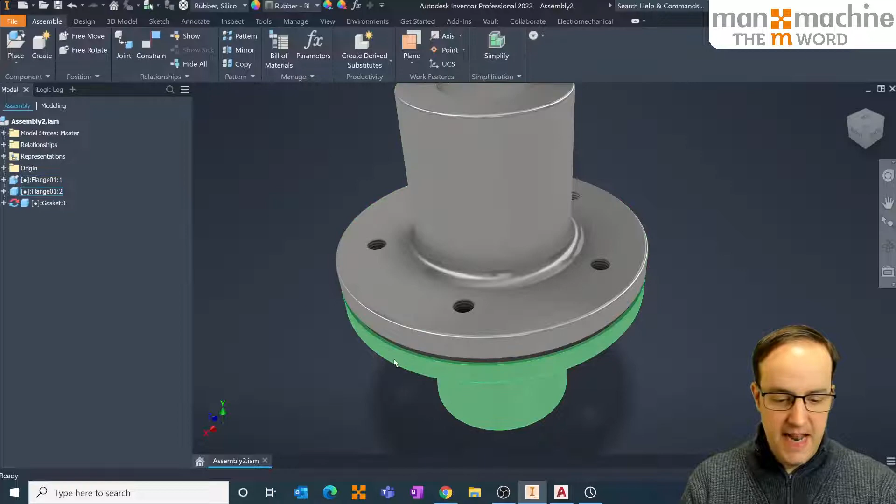So I've got a simple flange and gasket assembly here that I literally just threw together about 2 minutes before we came on air. Just a couple of simple revolves, nothing complicated. But what I want to do is connect these flanges together with a bolted connection.

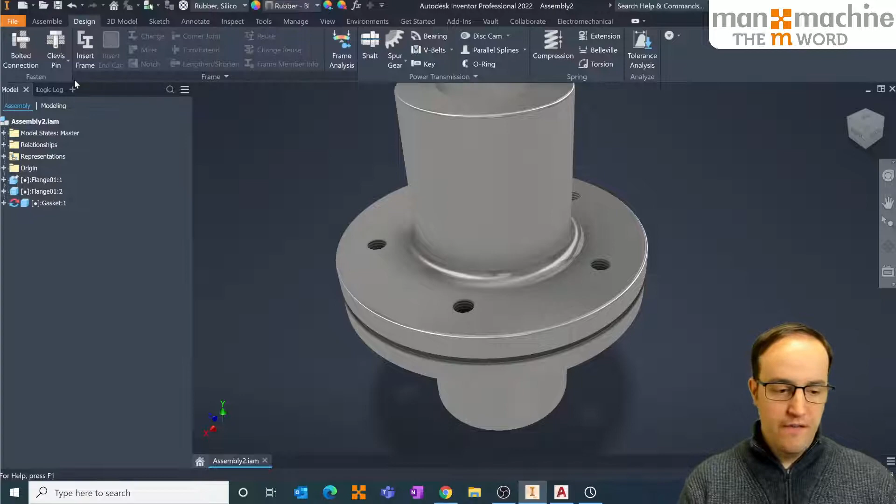Within my assembly environment, I'm going to go to my design tab, and we have a whole wealth of design accelerators on here for creating frames, shafts, spur gear assemblies, belt-driven assemblies and things like that. We're going to focus on bolted connection today because it's the simplest for our first session, just to give you a taster of what this is all about. But also, again, it's underused—there's people out there that aren't using this.

So let's start it up and show you what it can do. It's really straightforward and it can potentially save you a hell of a lot of time.

So when we're in our bolted connection dialog box, we essentially get a few different options. We can place those bolts on a linear XY dimension if we want to, concentric based on a circular edge, or something like that. I'm going to say that I want to pick an existing hole.

I choose a start plane, which is going to be the top plane where the head of the bolt sits—that's this top face here. Then I can pick my existing hole, so I can go and grab a hole. You'll notice it recognizes what's happened with my model.

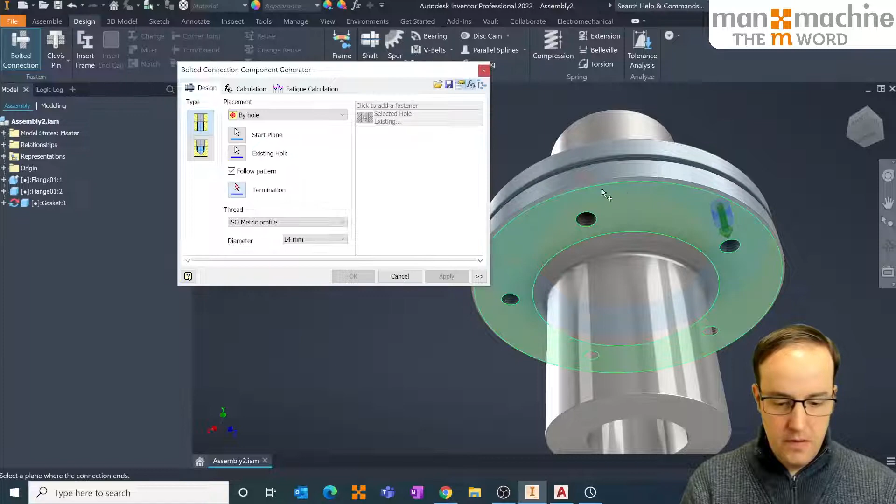Because I've built this from a hole, using the hole command and then patterned it, it knows that all of these are linked back to that original hole. So I go and select it, I'm going to ask it to follow the pattern, and I'm going to go and pick a termination plane underneath just here. What that will do instantly, as you can see, is a couple of things.

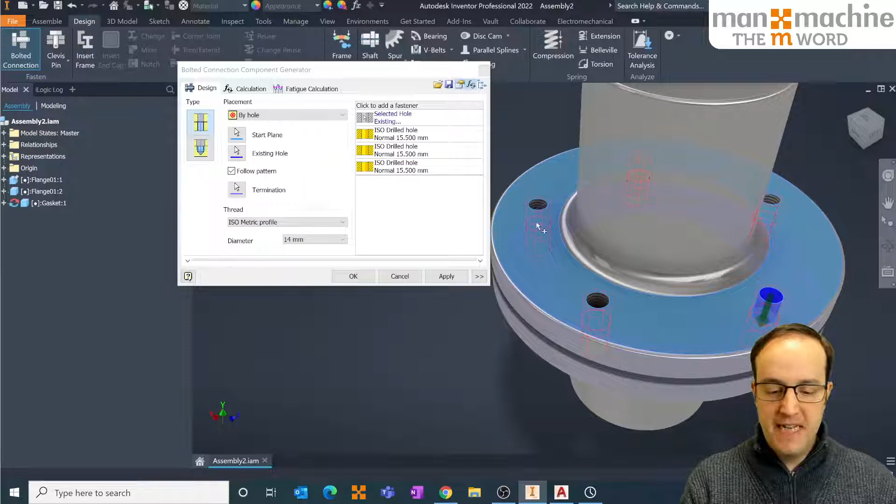Firstly, it gives me a preview on all of my holes saying that's where I'm going to place these bolted connections, and at the moment it's previewing that in red. Why? Because based on what you've selected at the bottom, which is using an ISO Metric profile, 14 mil diameter, it needs to drill a bigger hole. Based on that, I think these are 15 mil holes here rather than 15 and a half. It's telling us it needs to take away geometry or volume from this model in order for that to fit.

So it's going to drill additional holes in here. Which is great, and we can come in and chop and change that as we see fit, but I'm not going to—I'm going to say, great, do what you need to do and take away the excess material from here. On there, we've also got this add fastener option.

Now, the first time this loads, it's going to be a little bit slower than the second and third time because it's referencing my local Content Center from my database. What I can do, because I've selected the very top part of that tree, is select my bolt. So I'm just going to go in and select this hex head 4014 ISO bolt.

After that, it gives me the ability to add a fastener underneath, like a washer for example, or I can come and add a fastener underneath. I want a double washer setup, so I'm going to select an ISO 7092. And then at the bottom, after all of my holes, I'm going to select another washer.

I'll pick a 7092 ISO washer before eventually picking a nut, and we're going to pick a 4161 ISO M14 nut to fit on the end.

This gives us a little preview. We can change the length of the bolt if we want to, either in the window up here, or just by grabbing this and eyeballing it. So if you want a little bit of excess there, we can, or if it's too long and you want to take away, you can. I'm just going to put a little bit of excess on the end of the bolt, like so.

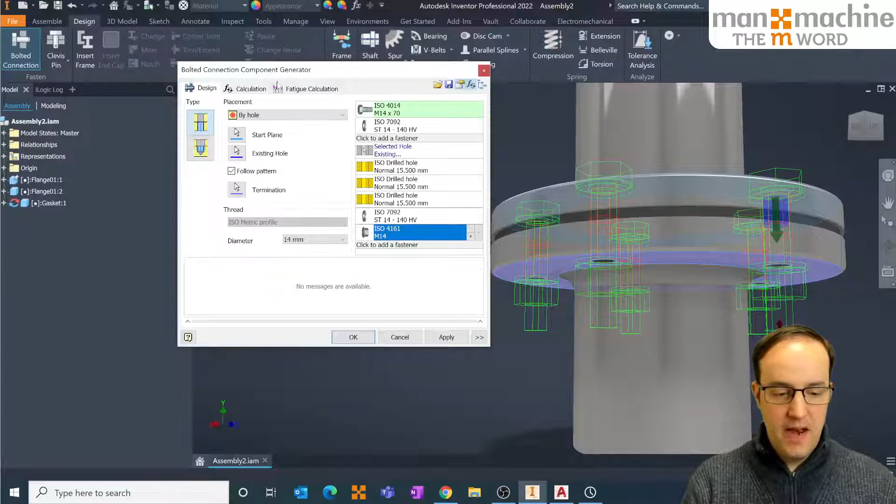Other things you have in here is the ability to come down and have a look at calculation, to get it to give us some basic hand calcs on that particular bolted connection to determine whether or not those components are going to be up to the job of connecting these systems together.

We've also got some base fatigue calculation that we can go into again if we want to after that, which again just looks at hand calcs and seeing if those nuts, bolts and washers are up to the job.

So if I just hit calculate on here and bring down my notes, we can see that it's missing some input essentially against those components. I've not put any particular forces on there, but it helps you as a designer go through things that you might be doing by hand and really automates them through the system, which is great.

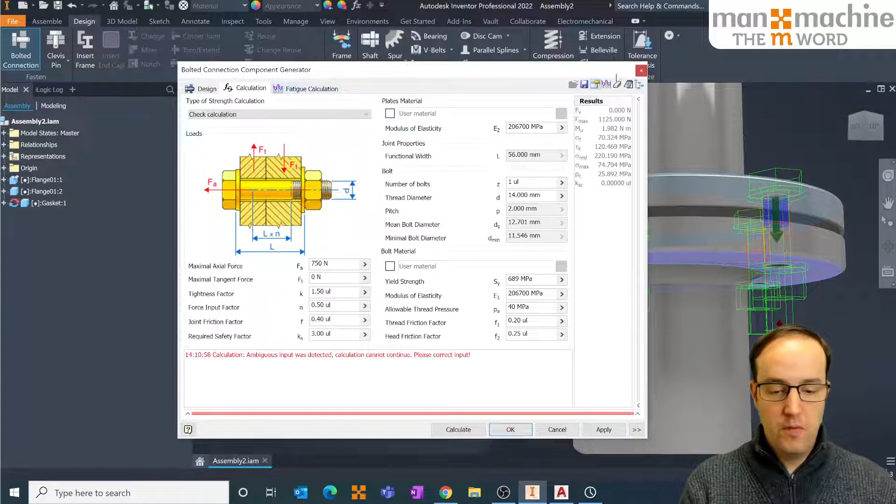If I hit apply, Inventor will pull those models from your content center, and once it's done that, typically the joy of live demos, it's going to crash on me. Don't you love it when that happens? Let's just try that again.

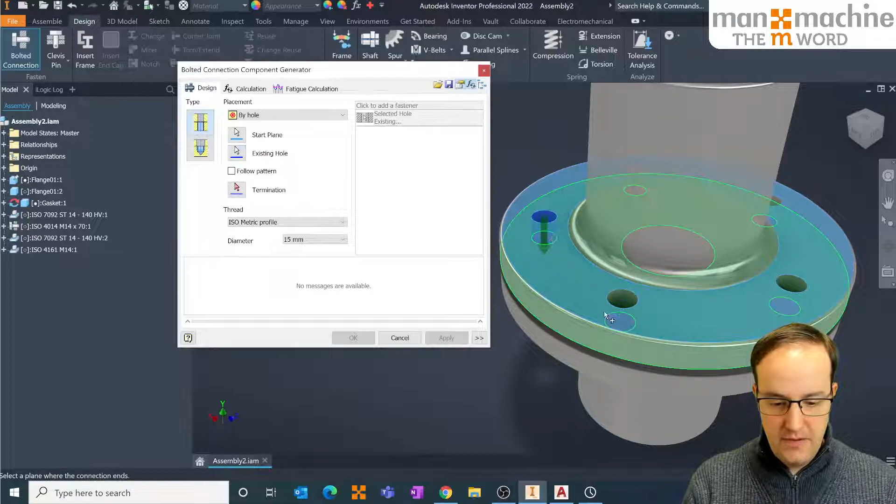By hole, start plane on there. The existing hole we want is this one, and then we want to have a follow pattern termination plane underneath.

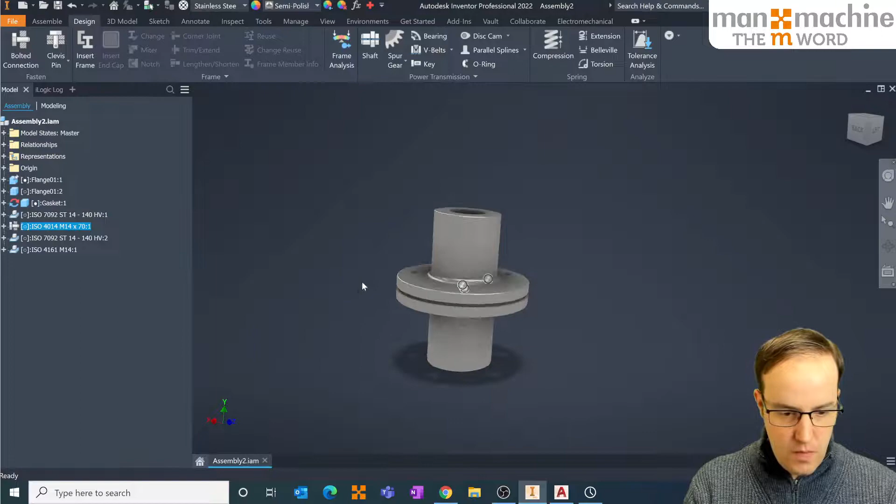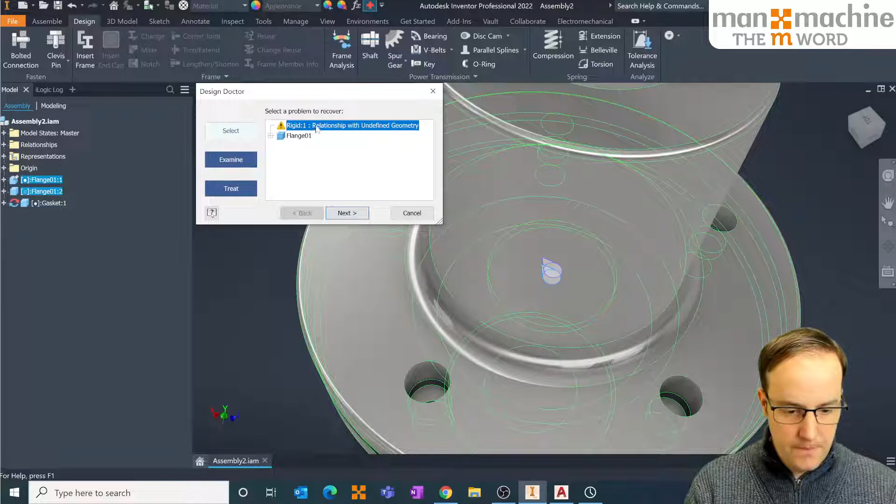Let's just take all of those off and try that one more time. My apologies, these sessions are not to show you issues; they're to show you things working. I think we've got a rigid constraint in there that looks like it's broken for some reason.

Let's have a look at that. Okay, we'll take him out. So let's try that again. Design a bolted connection by hole. There's my start plane, there's my existing hole. We want to follow the pattern, and then the termination plane is underneath.

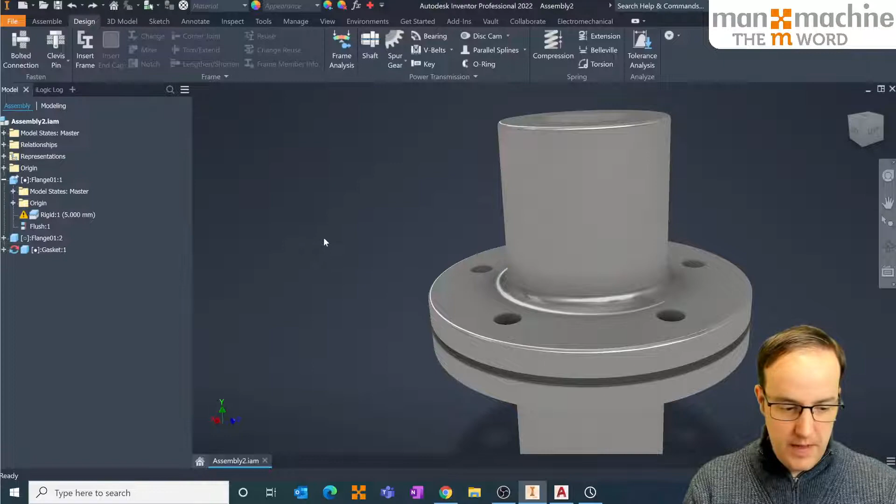Well, I really don't know what's happened there, which is great. Let's just do a few undos. Hit save. Try that one more time. I will only try it one more time rather than labouring the point. Clearly, I have an issue somewhere with my connections.

There's my hole. Thank you. Follow the pattern. Termination plane underneath. See, you really just wanted to see this several times. It was all on purpose, honest.

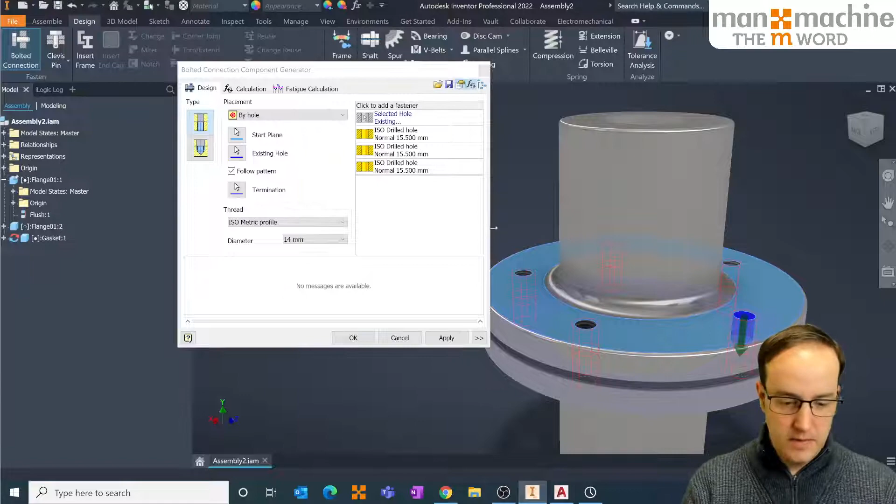So let's just quickly add those back in. I can use the template that I saved earlier. You see, now you don't know if it was done on purpose or not. I saved the template. Maybe I just wanted to show you the template being used. We'll go with that, shall we?

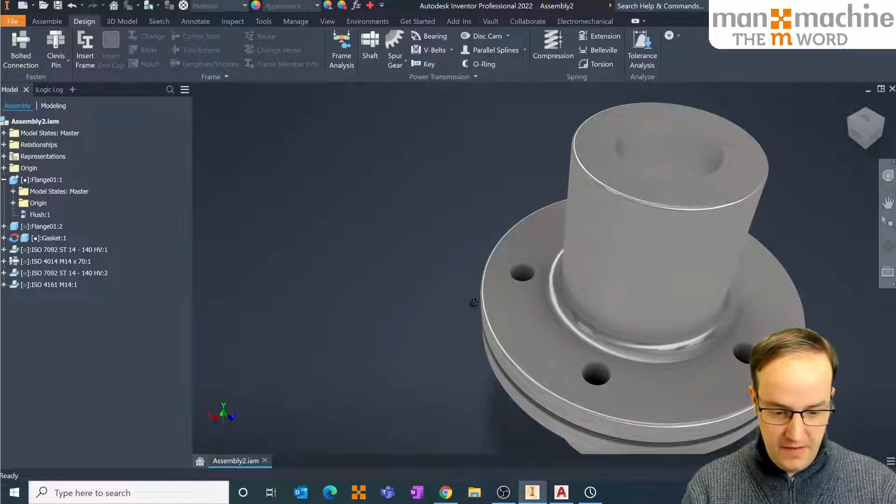So there's my template. Hit OK. And once again, Inventor does not place those nuts and bolts in the right place.

It's failing on the constraints, which is very odd, actually. So apologies for that, it's not showing this off very well. What you should do is take these nuts, bolts, washers, and place them constrained next to those components, which I'll show you on a component on its own.

Just to prove I'm not going mad, unless it is my install, which it could be. Let's save that away, Assembly 3, fine. OK, one more try. Bolted connection on the top, by the hole. Choose a termination plane underneath. Follow the pattern.

Bizarre, it's not picking up the hole. Definitely something untoward going on there, not quite sure what it is. My apologies, we'll show bolted connection again next time rather than labouring the point.

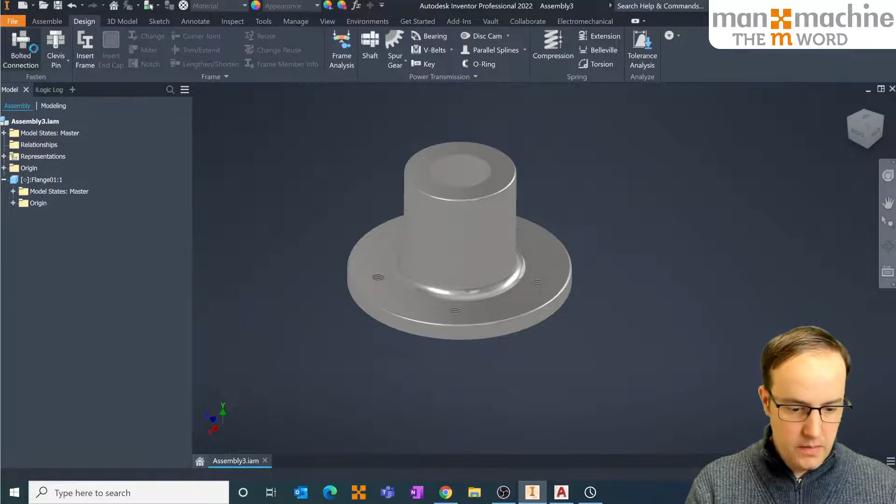But that will give you a bolted connection between two components, which you can set up and use as necessary. Now I see the problem, I've got several holes in that component. Why have I got several holes in that component? Go back, it's going to annoy me now, so I'm just going to keep doing it until it works. If I shout at it long enough, it will work. Follow pattern, termination plane underneath.

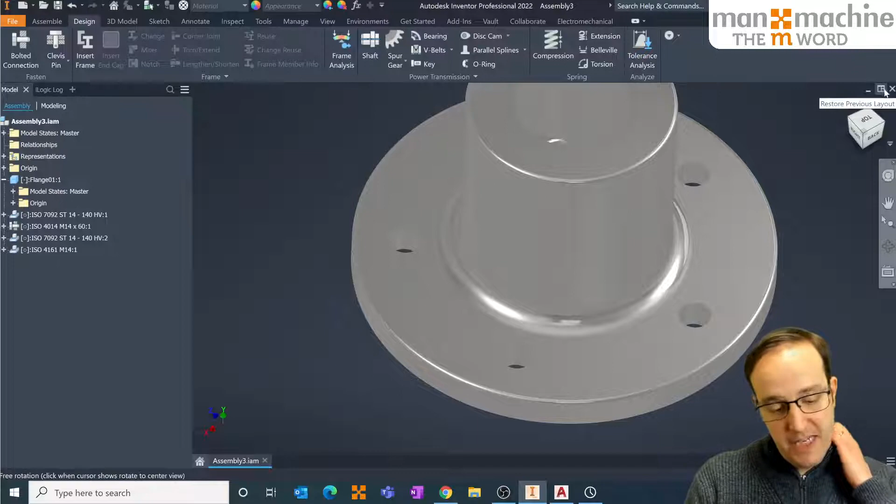Great, open bolted connection template, make it a bit smaller. Close your eyes, press OK. Clearly something wrong with my Inventor. Sorry chaps and chapesses, that's not worked quite the way I wanted, so that's a really good start for the first one of these. Let's close that down and go back into the main assembly, because the second thing I wanted to show you

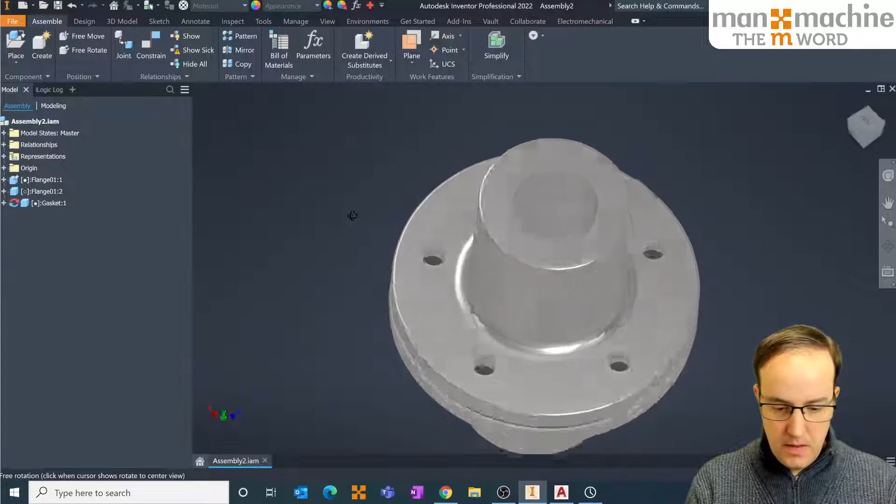is interference analysis. Inventor, believe it or not, has an element of clash detection sat inside. Hopefully the demo ghost won't get me again this time - he might do, he likes to get me. But what you can do inside Inventor, well I say now, for years this has been native functionality - we can run some basic interference checking to see if I've got any self-intersection or clashes between parts.

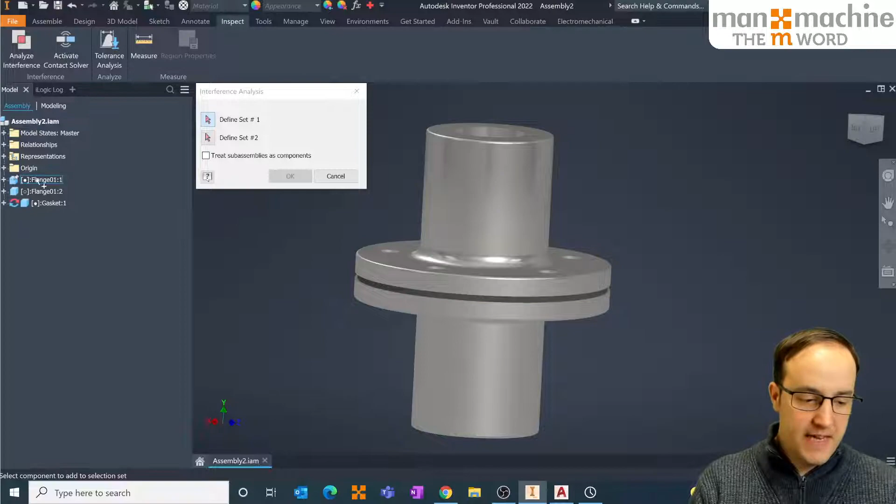So whether you are in a part environment or an assembly environment, I can hit my Inspect tab at the top, and I've got Analyze Interference. We basically choose two selection sets - I can do a window selection set for set 1, and a window selection set for set 2. For this purpose, I've got a pre-made clash, so I'm going to clash between the first part of the flange here and the gasket underneath.

I've just realised why the bolted connection didn't work - it's the same part twice, so the hole it was drilling through, it was trying to drill through twice. I'll show you that fixed in a second. That is completely and utterly my fault, not the software. I take it back - chair, keyboard interface problem.

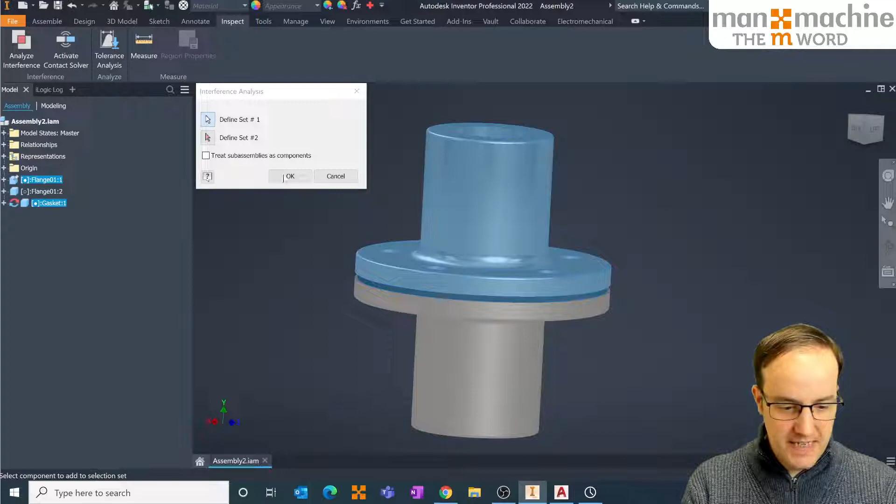So choose my selection sets, hit OK, and this will go away and show you and highlight any contact. Essentially on this gasket, I've just pulled up a thickened surface by a few millimeters. But nonetheless, you can imagine if you've got a massive component or a massive assembly, we can quickly identify and pick up interference. It will highlight that and show it in bright red in the model and give you information which can be printed out as well. That can allow us to go and find that gasket, find the particular problem.

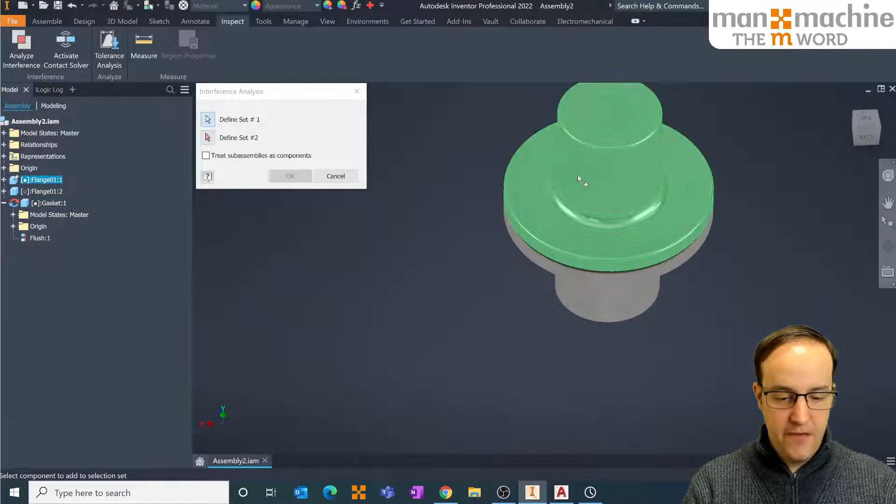In this case, it was a thicken. If I turn that off and once again analyze interference between those two flanges and hit OK, we get the problem resolved. So don't forget that you've got that Analyze Interference option in there, which can really help you.

The final thing in Inventor I wanted to show you is just reminding you of this marking menu that's been commonplace in Inventor now for 10, 11 years, maybe a bit longer. This thing's great, and still people aren't necessarily making the best use out of this right-click marking menu.

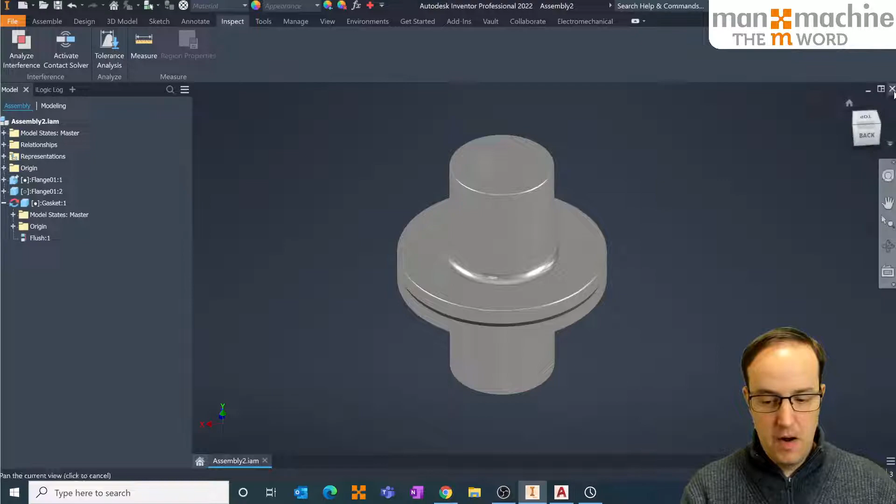To show that, if I just start a new part, what happens when you right-click with that marking menu is you get these segments, whether you want to call them segments, wedges of pie, wedges of cheese - let's go with segments. They allow you to be very inaccurate when you come to click, which means this bungee, as you pull off, is basically hovering over that fillet command wherever I click within this section. So if I click up here, it starts a fillet.

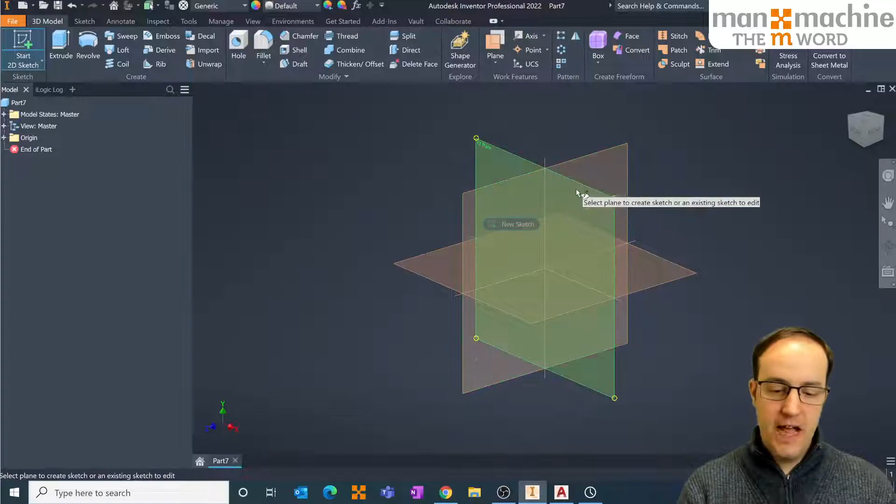If I click down here, it starts a fillet. What you can also do is this very quickly, and naturally the marking menu will update. So if you hold down your right-click menu, don't let go, hold it down. When you move, for example, downwards to New Sketch, and let go of your mouse, it invokes the command. Quite quickly, if I just click, hold, drag and let go downwards, it starts a new sketch. I can then create a sketch on the front plane.

If you look at the marking menu in the next screen, it's changed to contextual tools, so I see sketch tools. If I do the same thing to the top right, click, hold and drag to the top right, it gives me a 2-point rectangle. Click, hold, drag to the right is OK. Down is finish. And then, where's extrude?

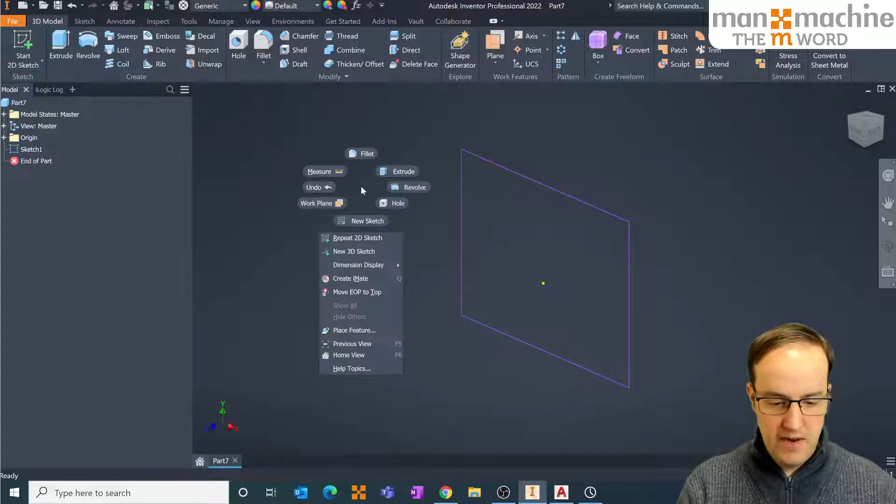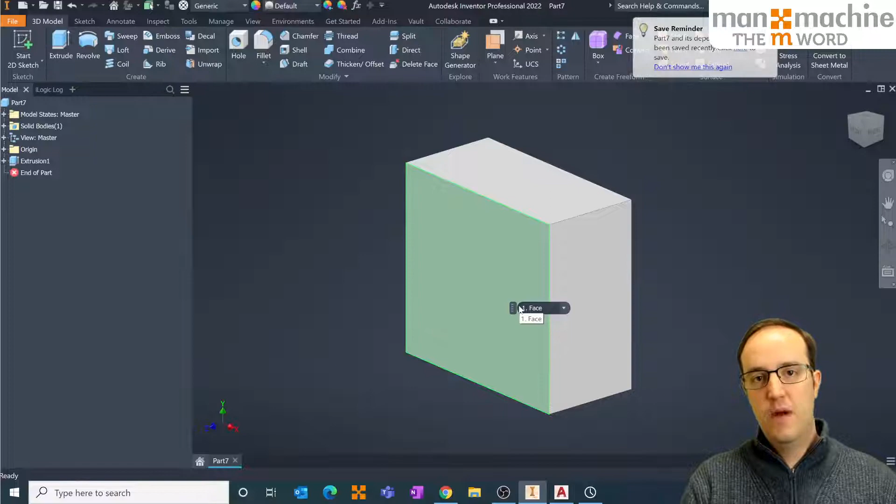I can never remember extrude. Top right, click and drag to the top right, you get extrude. And then to the right is OK. What that allows you to do, and you'll probably find this happening naturally, is come in and say new sketch, 2-point rectangle, OK, finish sketch, extrude, without even stopping to think or blink, essentially. So you've got some speed improvements there. That's neither here nor there until you find out that marking menu is fully customizable to have your own right-click options.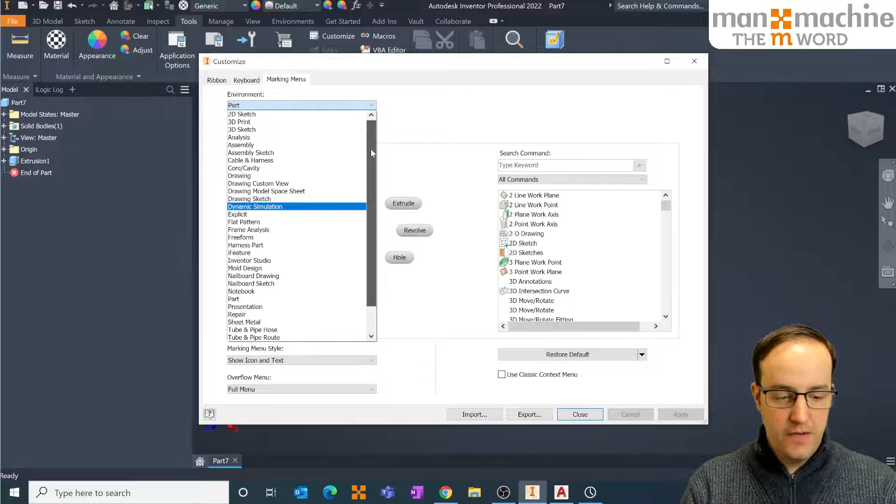If you've not seen it, head to Tools, go into the Customize dialog box, and in here you've got the ability to customize your ribbon, your keyboard interface, and your marking menu. What I really like is you've got all the different environments you can come in and change. I'm currently in a part, so it's automatically selected the part environment. But then we've got this sub-environment. These are all the default ones.

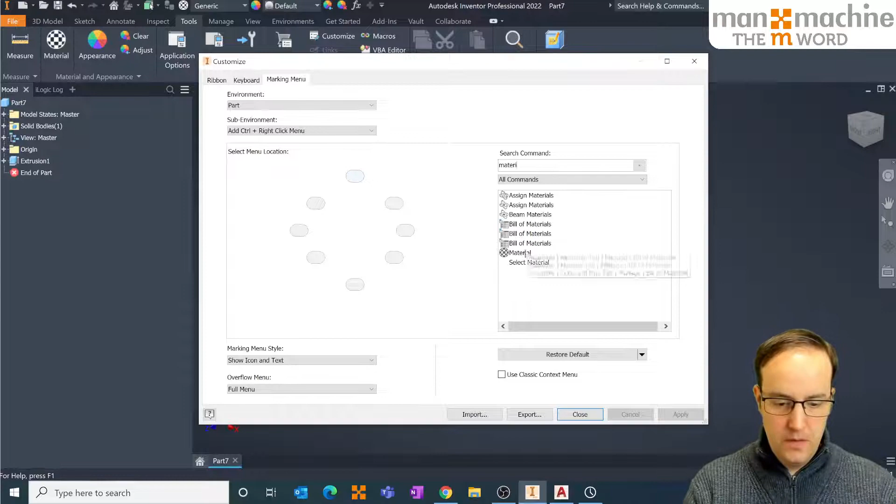You can actually add your own, which is a control and right-click menu, completely blank, which means if I hold control and right-click, I can get access to tools I otherwise wouldn't have on my marking menu. For example, let's go to the right-hand side and say I want to find material. I'm going to drag my material and place it over here.

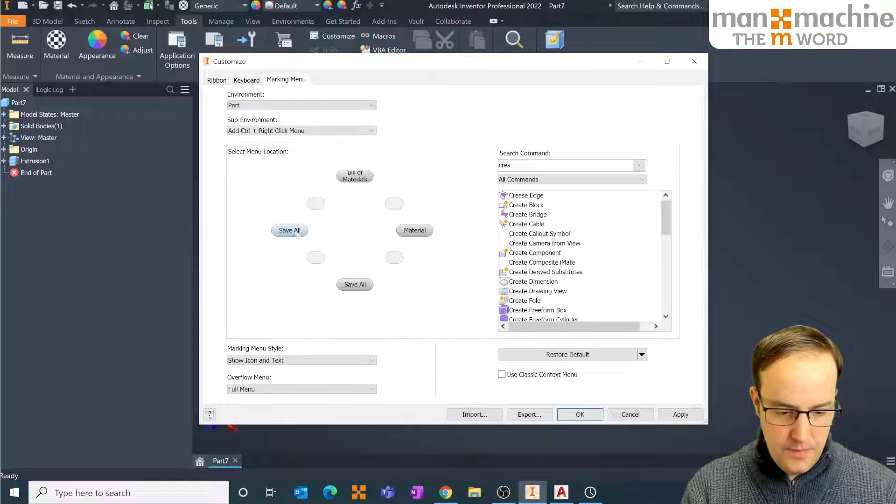I want to find bill of materials and put it at the top. I want to find create drawing view and put it on the left. And then maybe I want to find save all and put it at the bottom. Sorry, my mistake - you first select the wedge you want to affect, then create drawing view. There we go, and then you click the object you want in there. If I hit apply, again, you can export and import these to save them across machines. Hold Control, hit right click, and you've got that custom marking menu just there.

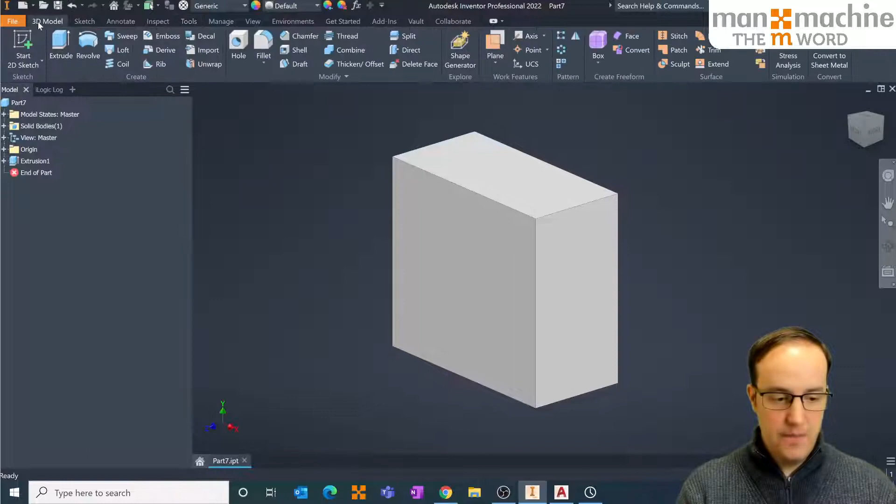Little things like that enable you to go quite quickly and really get tools in there that otherwise you're up here figuring out where it is in the ribbon, or scrambling for the keyboard shortcut. Your mouse as a designer wants to be here in the middle of the screen, not up there. So that's a really nice tip for you inside of Inventor.

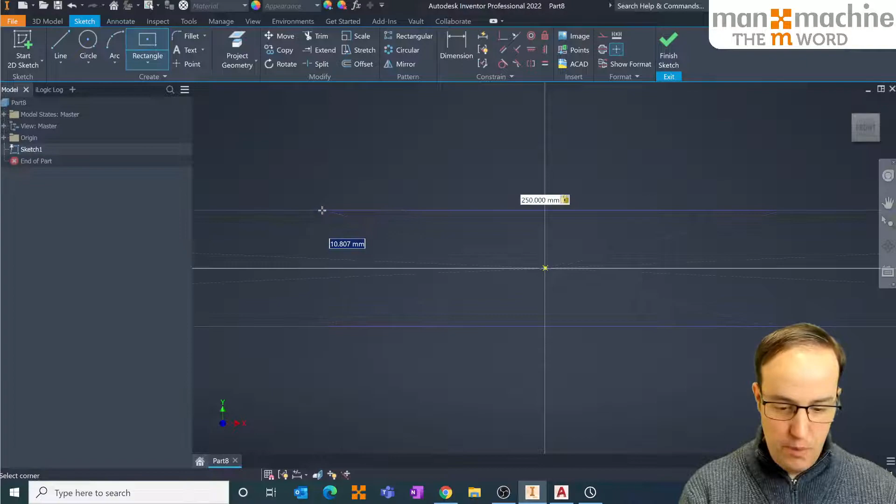Now, I don't want to leave Inventor with it beating me, so I'm going to try this one more time. I am determined to get a bolted connection working today because they are the easiest of easy things to work with, so why it's not, I don't know. So let's create a simple plate, 12mm thick by 250. And I know for a fact when I get back upstairs, one of my colleagues is going to say you didn't do this, which is why it didn't work. But that's the fun of these sessions, right?

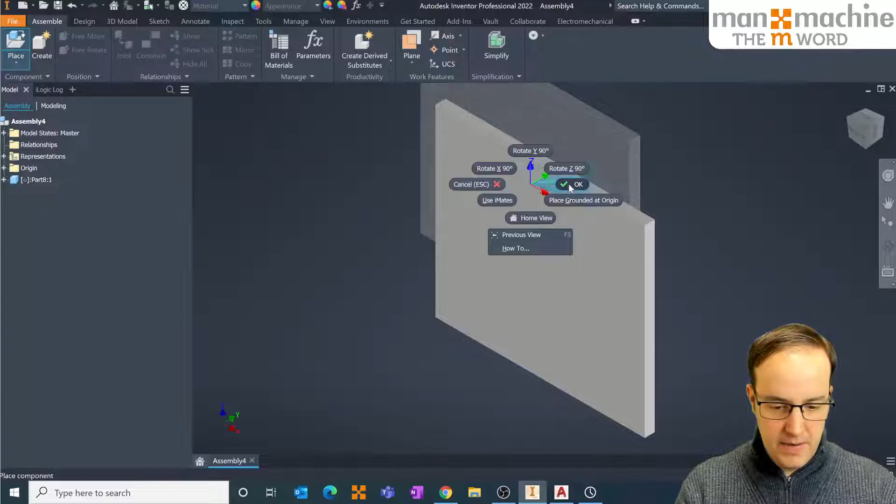So let's say, save that, place it there as part 8, and we're just going to put this into an assembly. Try that good old bolted connection one more time, just to make sure I'm not going mad. So let's place in part 8, as we did there. Lovely, press OK. Great, Design, bolted connection. I need to save the assembly. That's fine, I'm happy to do that, so long as you work this time, Inventor.

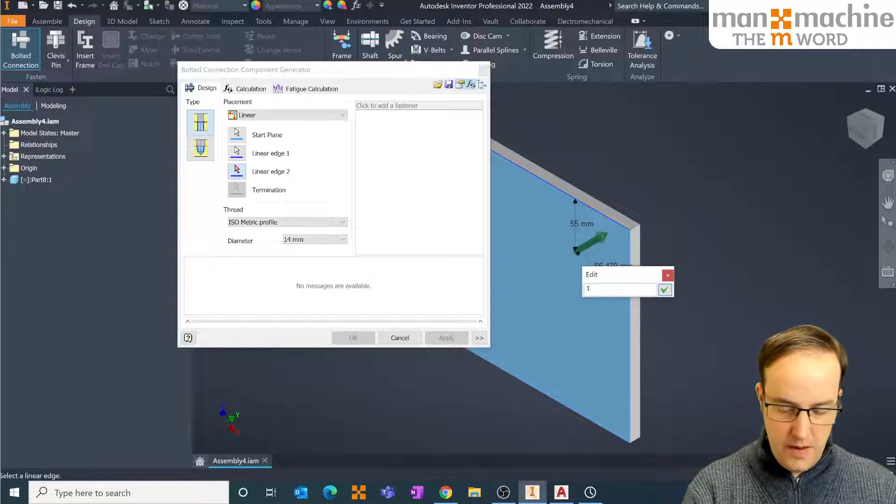We don't have a concentric point or a hole, so I'm going to say linear reference this time. Starting there, linear edge is here, 55. Linear edge 2 is here, maybe 105. ISO profile 14.

That gives me the location of my hole. From that point, the termination plane is underneath. There's my hole.

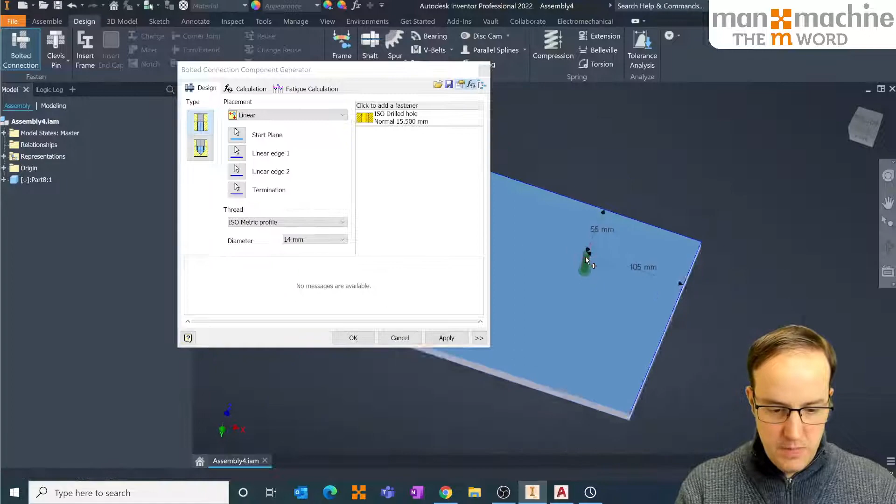Let's open our bolted connection template one more time. Press OK. Hooray, we have a bolted connection! I suspect there was something I clicked wrong there, so my apologies. As you can see, if I drag that bolted connection around, it's fully constrained.

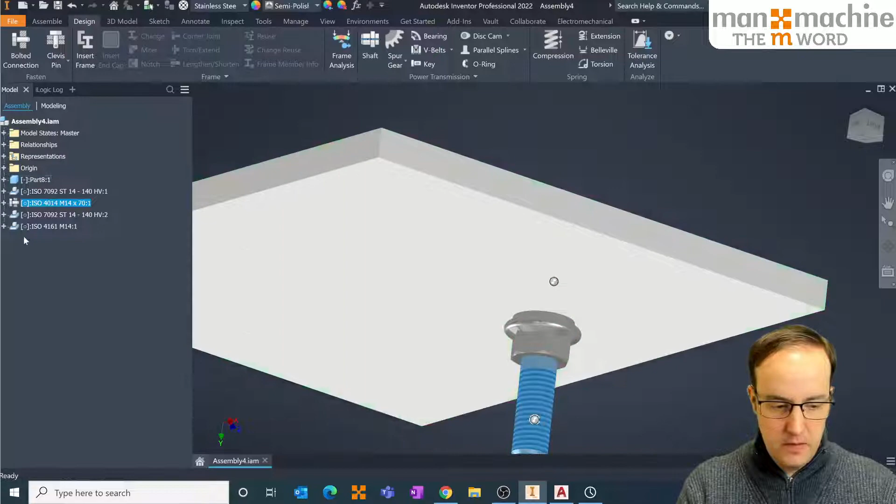If I ground part 8 here, grounded, the bolted connection is constrained apart from the spherical face, which is great. It's physically locked with regards to its movement, apart from the rotation, which is fantastic.

So if that had worked first time, I'd have been saying how bolted connection is great and it's saving you loads of time. As it is, you're probably looking at that and thinking, well, it didn't work. So hey ho, but take my word for it, it works fantastically well, especially in an assembly. So those are the tips I wanted to show you in Inventor.

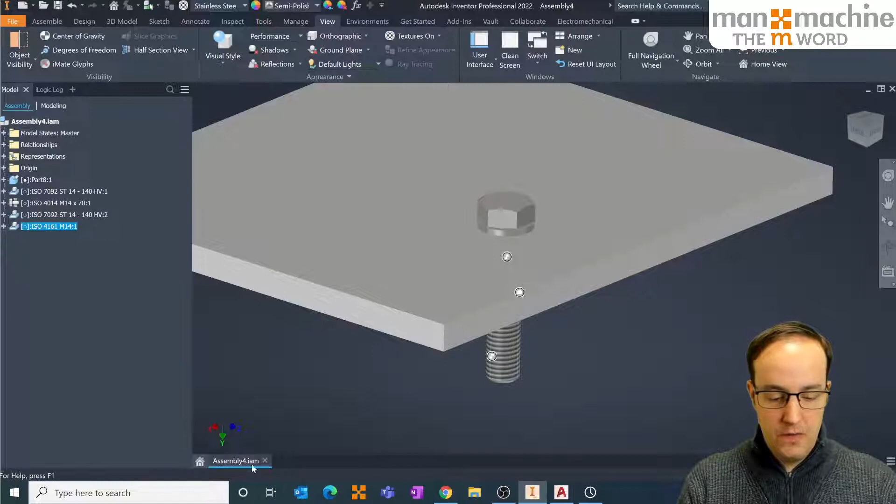Appreciate you're not all Inventor users, so I'm going to end inside of AutoCAD. I've just got one half of the flange I had inside of Inventor, and I'm going to share with you my single most favorite tool inside of AutoCAD, and I think it's great. That's the oops command.

I'm sure you've all heard of the oops command, but when I train, or when I used to train, I was quite surprised at how many people didn't know it.

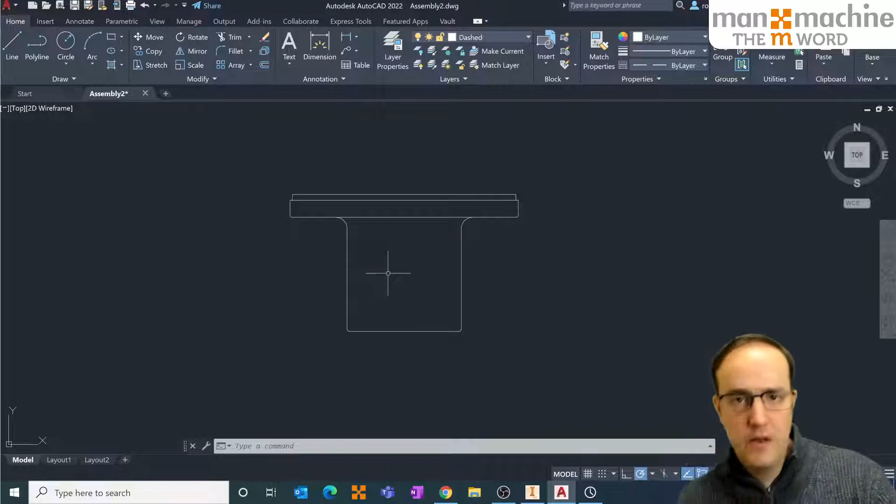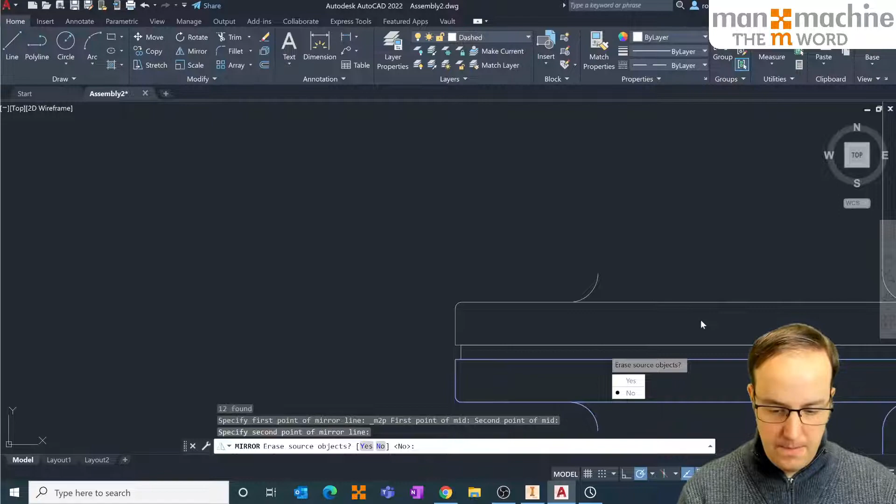So let's take this edge here. I'm going to delete it, but then continue working. I'll select all of these components here, and this edge. Good. And I'm going to mirror them around the center of the gasket there. Snap overrides, mid between point and point, and let's mirror it that way. Erase the source objects? No, I want to keep those.

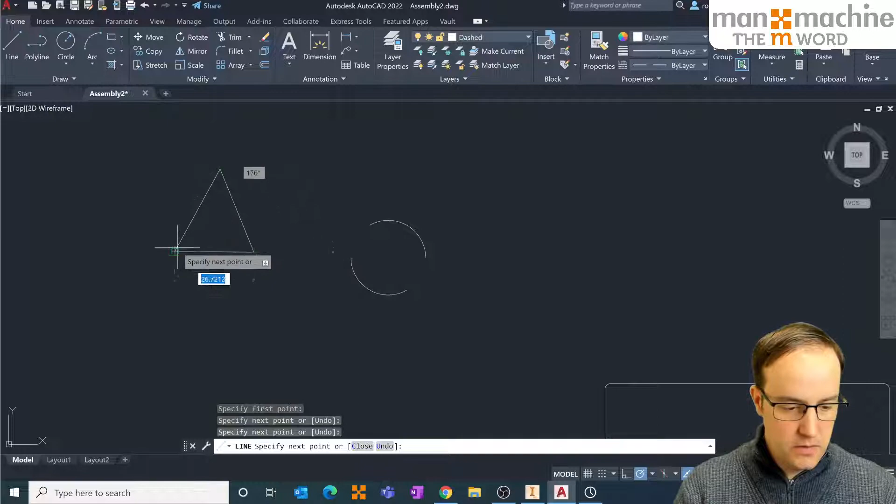Oh, I've got a gap here, so let's put a line in there. I must have forgotten to select one. Oh, that's on the wrong layer, so let's be naughty and put it on layer 0. Don't tell anyone. And let's carry on working, drawing some really detailed geometry over here, such as circles, triangles, squares, and lines.

Oh, we've got a problem. We deleted something earlier. I know it's only a line in this environment, so it's not a problem, but imagine you've deleted a block, or taken out something by accident, and that deletion was 15 minutes ago. If you type in oops and press enter, it will...

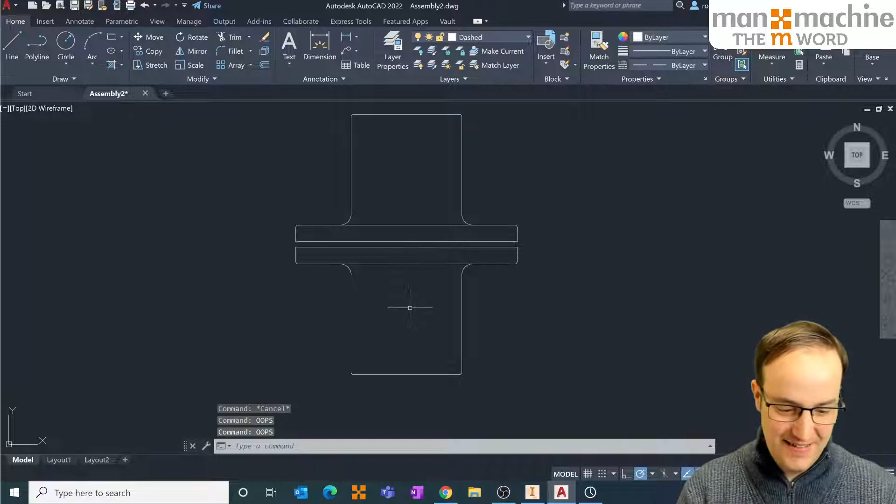Nothing's working for me today at all. Oh dear. Oops will undo your last delete. No matter how many things you do in between, if you type in oops, it will undo your last delete. Apart from, because I'm doing a YouTube live, it's decided it doesn't want to undo my last delete.

But there we go. What oops will do is take the last thing you deleted. It doesn't matter how much stuff you do in the interim period. We can go on here and do whatever we need to. If we type in oops, it will bring back those components previously deleted.

And that, technically, apart from being a bit of a shambles, was all I was going to show you today. Just to give you an idea of the kind of flavor of these sessions, tips, tricks, things inside of Autodesk software to hopefully help you day to day.

I'm now going to go and throw my laptop out the window and run over it in my car a few times. And hopefully next time we do this, next week on Monday at 2 o'clock, hopefully it will behave itself.